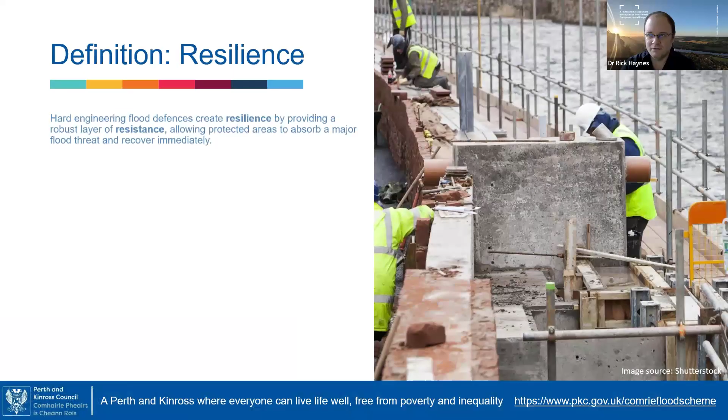So just to start with, I thought I'd pull up a quick definition of resilience in the context of a hard engineering flood defence. The terminology in flooding is complex and sometimes can be misunderstood by public and practitioner and policy alike. But in my interpretation of this, we create resilience by providing resistance to the effects of flooding. And we do that at a range of scales, in this instance at the immediate community level by providing direct protection to homes and lives, reducing trauma and flood anxiety.

In this instance, you're seeing a large scheme. It's something visible, it's something weighty, and it can play positively to mindsets of those that have been affected. And these things will invariably provide a reduction in property damage, allowing the community as a whole to resume normal life relatively quickly, sometimes instantly. It also plays at the national scale because we have economic productivity. In this instance for Comrie, it's got a large amount of tourism interests. It is a very pretty village in the Perthshire countryside, and that plays to the national economy.

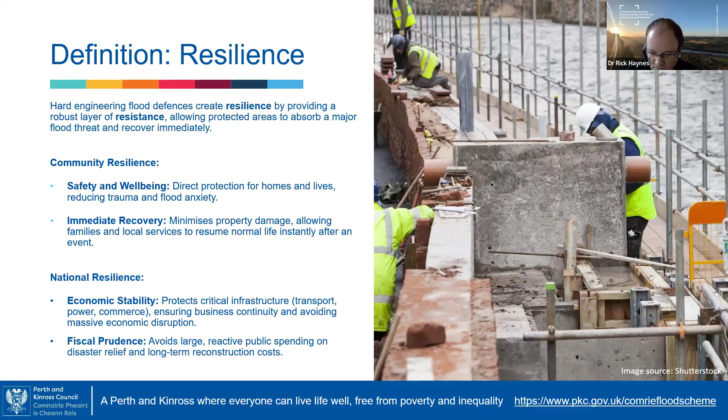So Comrie itself, for those that are watching and don't know the Scottish countryside, and I say that to a degree myself, I've been in post 18 months now, so I'm learning a lot of the geography, both in terms of rivers and communities. But Comrie is on the confluence of three watercourses: the Earn, the Lednock, and the Ruchill, the Water of Ruchill, or Ruchill Water, depending on how you reference it.

This is one of the larger strategic flood protection projects that all local authorities in Scotland are looking to deliver where appropriate. And the council, under the necessary legislation, is a responsible authority. So there are various labels: local authority, flooding authority, but in the Flood Act, we are a responsible authority tasked to promote sustainable water and environmental management. And this is one of the options that is being taken forward.

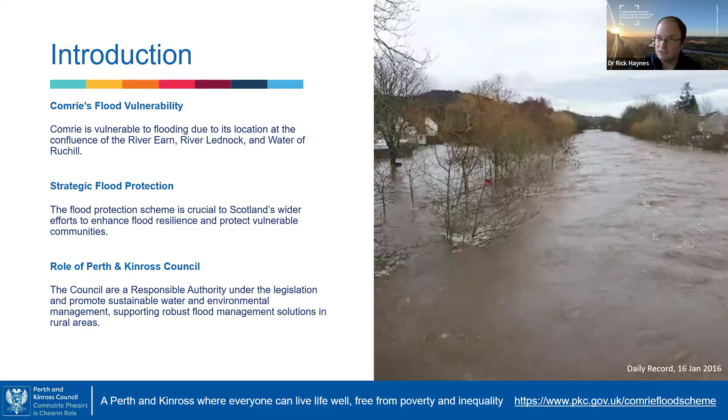So the flood scheme itself, from the EU Floods Directive transposed down through the Flood Risk Management (Scotland) Act 2009, sets various responsibilities for various parties, and that ranges from government down to the individual. As with all legislation, there are good bits and more challenging bits, but the reality is everybody has a part to play in flood risk management.

In terms of the local area, Comrie falls within the Tay local plan district, and the areas of interest are covered within the flood risk management strategies and then into the local flood risk management plans. The strategy initially sets out a high level view as to which communities are perceived to be more at risk of flooding compared to others. And then the local flood risk management plan puts the onus on a collection of local authorities at a catchment scale to refine thoughts, theories, and approaches on what they will be doing to mitigate the impacts of flooding to those various communities.

I'll try and step through these quite quickly and we can get to the images at the end. Now, I'm not expecting everybody to read all the detail here. This is an illustration of the action put to Perth and Kinross Council for Comrie in potentially vulnerable area 08/14, which is Comrie in this instance, to deliver a flood protection scheme.

And this is the sort of distillation of all the national assessment of communities at risk around Scotland, and various standardized structured reporting for what the issue is, who will be involved, are there any related activities, what are the potential impacts, and the relative ranking at a national, local, and LPD scale within a 6-year period. So the Flood Act working within 6-year cycles. So that is done for schemes, studies, natural flood management, surface water, a number of actions under the legislation.

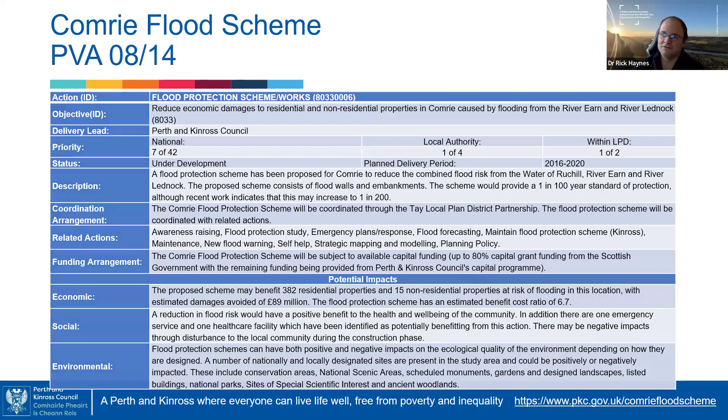So timelines associated with this specific one, and each study and project and scheme is different. But to illustrate the 3 phases of planning, design, and construction, the earliest study that the council has for sensible reference to came from December 2006. Now, there will be a number of studies done for locations that are at risk of flooding, in this case 2006, but there have been more since then.

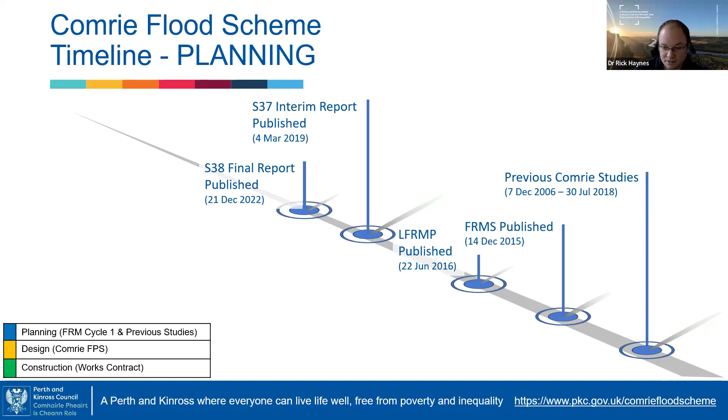The strategy was published in 2015, the local flood risk management plan in 2016, and then the halfway report, the interim report in 2019, and the cycle 1 final report in 2022. So this was the flood risk management cycle 1 key reporting exercises. We then were moving into the sort of outline design phase, which started with tendering in 2017. Sweco undertook the outline design until 2020.

Statutory process for notifications and consultations took over a year from 2020 into the end of 2021, and then moved into detailed design, having done a local authority hearing to consider objections that were lodged to either detail or the wholesale view of whether the scheme was necessary, effective, or appropriate. And after that was addressed, it moved into detailed design phase from 2021 until 2023.

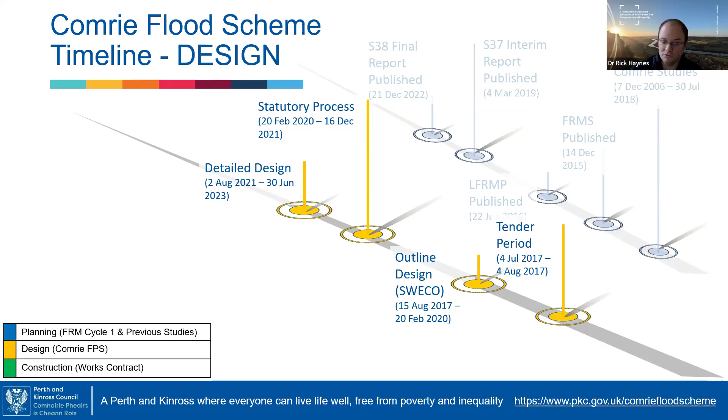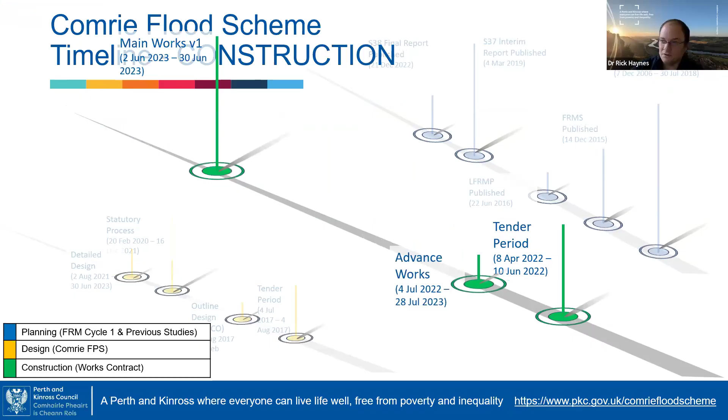Construction, with tender period starting in 2022, there were some advanced works, which I'll show pictures of later, starting in the middle of 2022. The main works, there was an attempt to start in June 2023, but the tendering period for that didn't work out well, so we had to do a second tender exercise in the middle of 2024. That was successful, and as I'll show in the images, the main work started towards the end of 2024 and they are expected to conclude by the end of 2026.

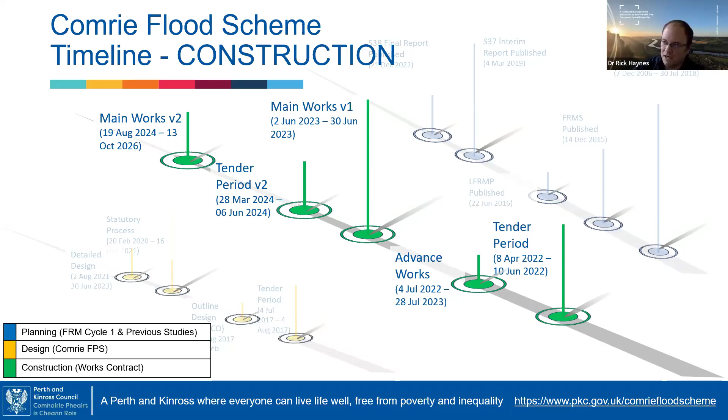Obviously, this is a live project, so October 2026 may be retained or it may move, just as construction projects typically do. The main point of all of those moving markers is to show that this is a very, very long process. From the earliest studies available in 2006 to the end of construction expected at the end of 2026, you're talking the best part of 20 years. Now, some schemes might take less time, some schemes may take more time, some schemes may fail along the way for one reason or another.

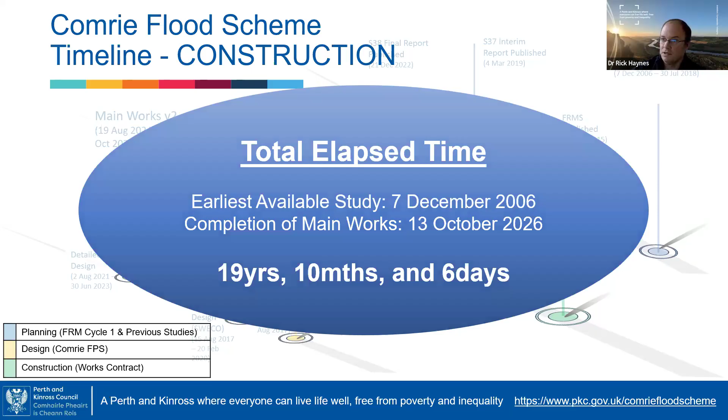But for Comrie, we're looking at the best part of 20 years of effort along the way, changing science, changing policy, certainly changing resources and changing contexts generally. So it's not a quick exercise to deliver one of these things. So some key facts for those that don't know the sort of structure of Scottish flood risk management. The outline that you should be seeing now is the Tay local plan district in red, with a small orange blob towards the lower side of that red boundary, which is Comrie itself.

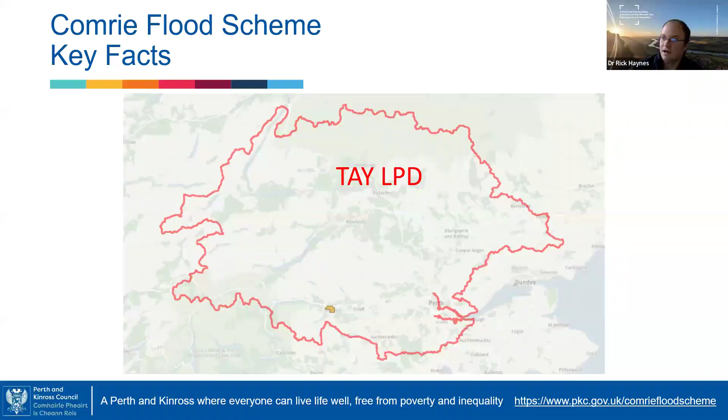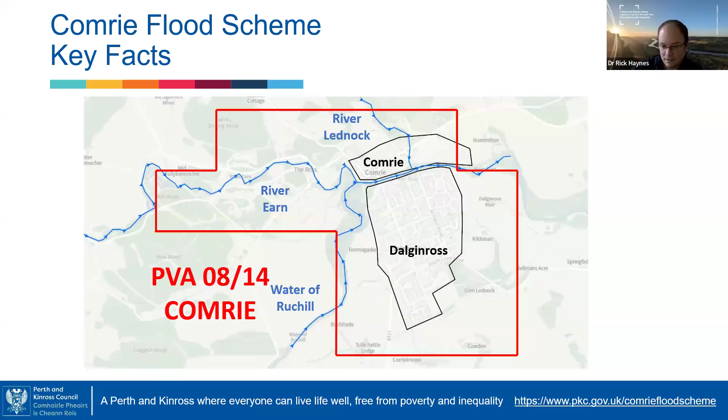And I'll now move across to zoom in on that potentially vulnerable area, and you should be seeing an illustration of the confluence of the three watercourses, the Earn, the Lednock and the Ruchill, and then the two main urbanised pieces of Comrie and Dalginross. And these are the community areas that are mainly at risk of flooding and have been clearly for a number of years. So that's the sort of local geography of where we are intervening.

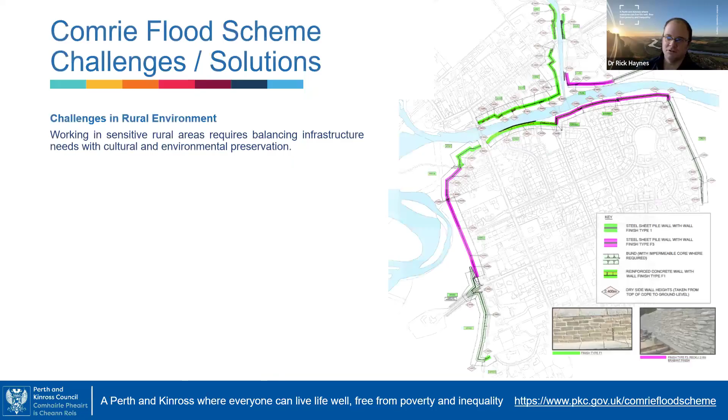A number of challenges. It is a rural community. We have to be sensitive to balancing infrastructure with cultural and environmental preservation, with historic heritage spaces. You have to be careful with design that it's effective, but also in keeping with what the community wants and needs. And that involves a lot of community engagement.

We have both the contractor and also us as client on site daily, engaging with the community through community councils, individually, just providing updates as best we can, adapting things as we go along. So if there are approaches that need to be adjusted, we will do.

Let's move on to the next. Come on.

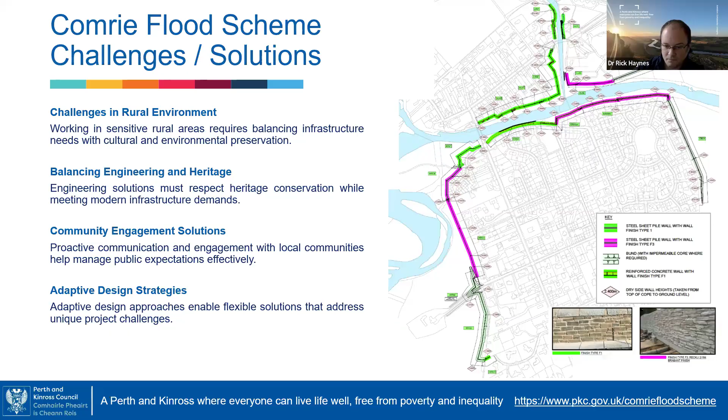So some key facts for the scheme. We're looking at best part of 3 kilometres of new defences, mostly walls and embankments. Best part of 190 properties, both residential and business, better protected after we finished. According to the assessments, we're looking at more than £41 million worth of future flood damages avoided, and we are doing so by constructing to the 0.5% AEP, or the 200-year standard of protection.

Obviously, that's a different metric in Scotland compared to down in England, where traditionally the standards of protection and the assessment from a planning perspective as well is on the 100-year. Designer, we appointed Sweco to be designer, and they are still providing input as we go through construction. Balfour Beatty were appointed through the SCAPE framework with their early contractor involvement starting in 2021,

and then providing the advanced works to the tune of 1.3 million over 2022-23 before getting into the meat of the contract, the construction contract over 24 to 26 at the best part of £27 million. So that gives you an idea of the sort of numbers associated before it all started, and the illustration is to show a little bit of the difference between sheet pile walls and earthwork bunds to protect the communities on both sides of the watercourse.

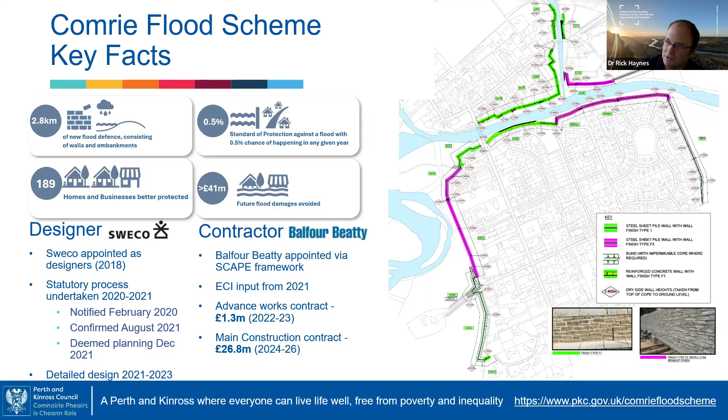Like I said at the beginning, pre-construction, we did have objections, and the statutory process requires us to consider all objections, whether it is 200 or 2,000. We have to consider them all equally, and that was dealt with through the local authority hearing. It's a long process to go through this, and it can stress communities when they know things are being considered and progressed, but we have to go through the process.

And that involves getting through procurement and early contractor engagement in a challenging economic climate. It is never a straightforward exercise to appoint contractors, especially on big schemes like this. So we've learnt that maximising the early contractor involvement has a benefit on the procurement and pushing the project. So there's multiple benefits involved in this.

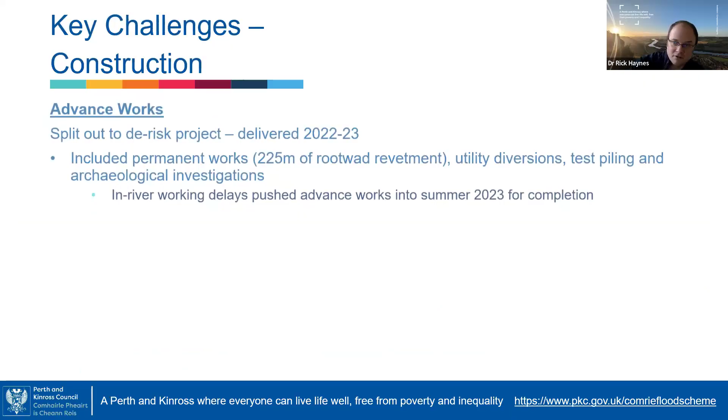And then obviously you've got a timing aspect to think about within in-river working. And that's driven predominantly by licensing for certain watercourses. You can't go in certain parts of the year, but also flood events, they come through, and from a safety perspective, you have to react accordingly.

Main works, like I said earlier, awarded in 2024 and expected to complete at the end of next year, 24-month programme. We did a soft start to allow the contractor to get involved as best they can early, and also to lessen the impact on the local community. We didn't want to just turn up on a Monday with all the equipment and just start hacking at the countryside and start building things. We had to work carefully. Things like tree felling, to make sure that it was done sympathetically and with the engagement with the community.

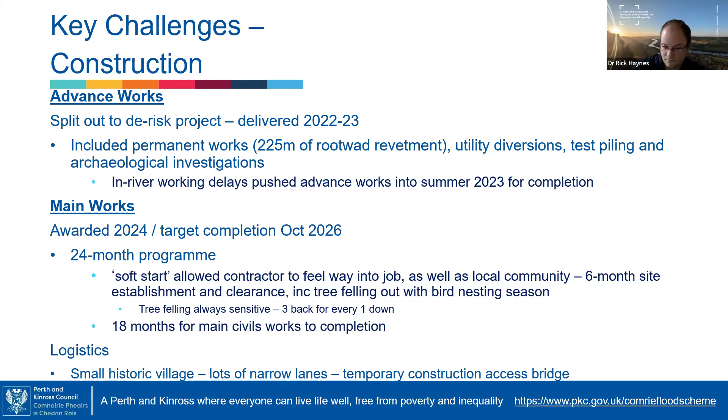But it doesn't look nice when you've cleared all of those trees to an established community, but it's part of the bigger engagement process and part of the bigger picture of delivering a flood scheme. Let me move on.

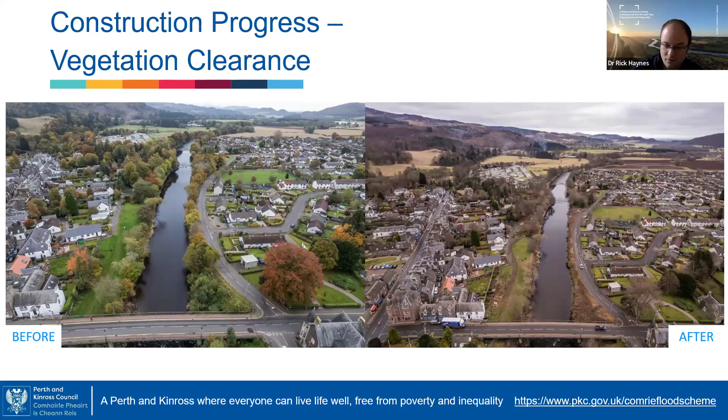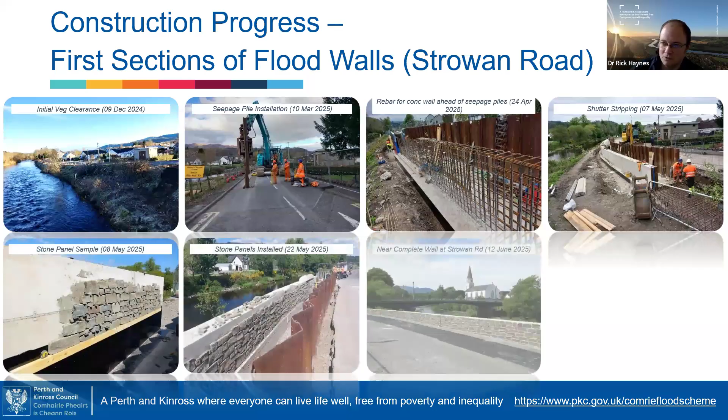Next few slides are some illustrations of some of the local works as they're delivered. What you should be seeing now are some initial sections of flood wall going in, and they are both right up next to the watercourse and also some setback. Hidden features, like you see in the illustration with the blue excavator, installing seepage piles to stop the subsurface movement of water behind the scheme.

We're trying to turn some of the effective engineering approaches into something sympathetic to the local heritage finish. So we're doing natural stone finishes to what are effectively rebar, concrete, sheet pile, structural walls, and making them look more in keeping. Obviously, they will look very new at the beginning, but they should age.

So that was some of the initial works, and that's all in one location. It's Strowan Road in Comrie, and you can see it on Street View, and go back into the photos and see what it used to look like and what it looks like now.

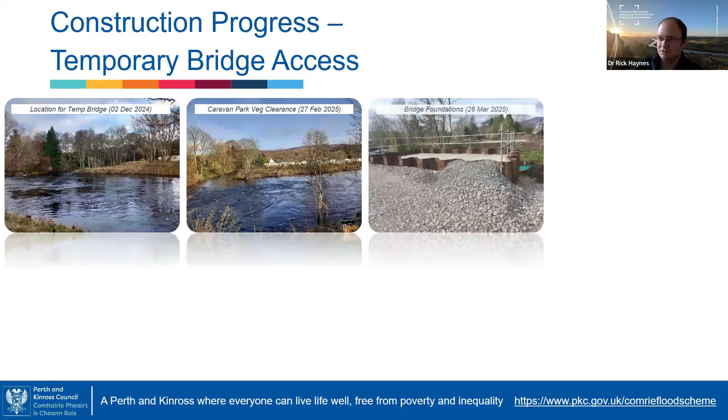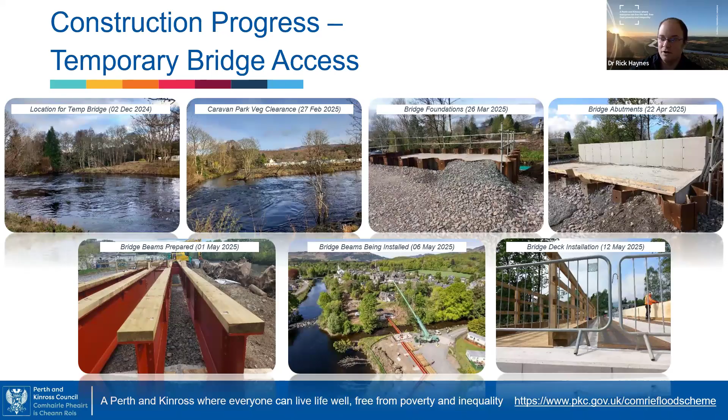Like I said, we did have to introduce a temporary access bridge to get access to certain bits of the site across Comrie. It's not a small bridge. These are quite intensive exercises to enable what is effectively a flood wall and flood embankments to be constructed, but with the equipment needed to do the sheet piling work, you couldn't get down to some of the locations using the local tracks and roads. So we had to install a temporary bridge, which will be removed once we are complete, but it shows what needs to be done.

The advanced works that I mentioned earlier, we are doing and will consider natural flood management approaches, so saving some of the cleared materials in terms of trees, both locally and from other projects, and then installing them into the bankside to ideally reduce the amount of erosion on the outside of a bend.

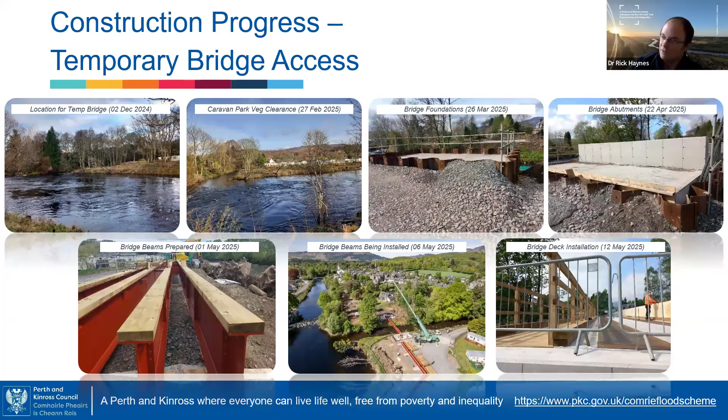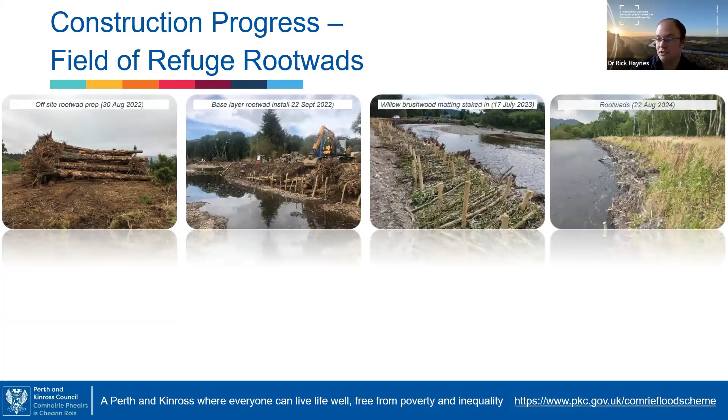They don't always work perfectly for the lifetime of when we need them to. So there was some degradation and some scour. So we had to come back and put some rock armour around the root wads, but not using steel and concrete, to stabilise the banks.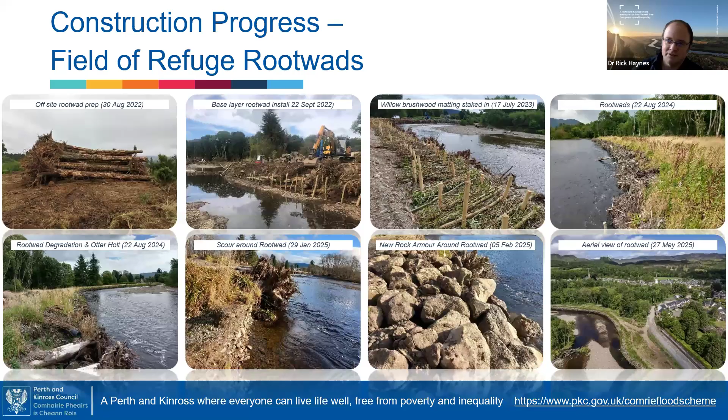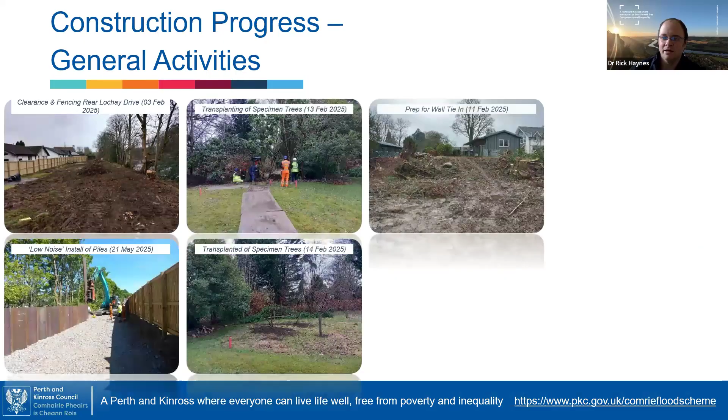Some general activities that go into delivering one of these schemes. Obviously, we've got to get access down the back of people's gardens. So there's been some negotiation with multiple property owners to temporarily curtail their garden usage while we can get in and build the scheme. That will obviously be reinstated, and we work with each property owner to deal with reinstatement.

We take a pre-clearance survey of what they had. We engage with them along the way, and then we talk to them towards the end about reinstatement and what they want. We'll also do some transplanting of specimen plants and trees where practicable. So we're not just turning up and clear felling everything in the way. We'll look to relocate plants of particular significance, either to the community or to the individual.

And then we've used, along the back of the houses, low noise piling rigs to reduce the stress on the nearby residents over, in that case, May and the summer months. This went through the summer period. There were noise monitors on site permanently, and there were regular meetings with the residents to ensure that they were kept up to speed with how the piling was progressing, how quickly they were going to move on, and whether there was any damage or negative impacts of the piling experienced from their side of the fence.

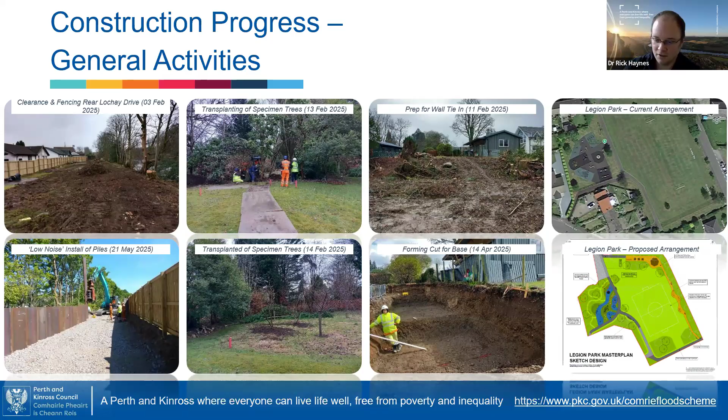We had to do quite a bit of excavation in certain parts to tie in walls to the higher ground around the properties. So it's fairly invasive, intensive work. But at the same time, we're doing community projects as well. Legion Park is one of the local play parks. Some of the stones from the bank protection that wouldn't fit within the works are being repurposed to be part of the play space. We're also taking the opportunity to update and upgrade the play park there. So we're trying to do other things than just build embankments and walls.

For those with more of a project delivery and management interest, this is just an illustration of the fact that we are in the meat of the project now. We're early December. There's no real detail needed to be pulled out of this, except to say we started at the end of last year and we'll go to the end of next year, and these project phases have not moved, so we're in the middle of it all now.

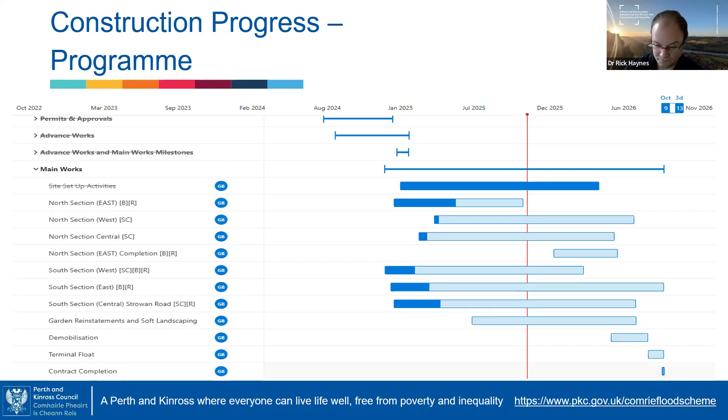That was in terms of time. This in terms of tasks. 14 tasks left, 34 completed. So 71% of the project is completed. There's a lot of clearance and installation of materials. Now it is the fine finishing work and the reinstatement into the end of next year.

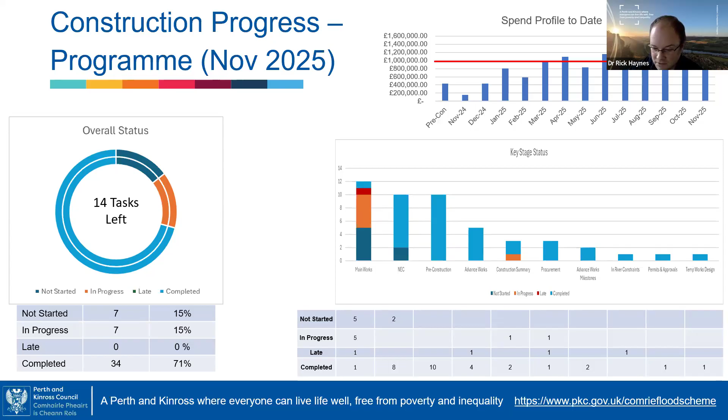The key bit to take away from this is obviously the spend profile, which gives an illustration of where most of the spend and effort is going. But broadly speaking, Comrie Flood Protection Scheme runs at about £1 million a month of spend, which to my mind is not an insignificant amount for a local authority to manage. Over a 2-year period, it's quiet at the beginning, and then there'll be something towards the end. But running at £1 million a month for 2 years is a decent amount of money.

And then hopefully this slide will start to work for people. I did trial it just before everything started. These two videos are basically separated by a calendar year. We run drone surveys every month. We use it for project and discussion purposes, but you can start to see where we are building things.

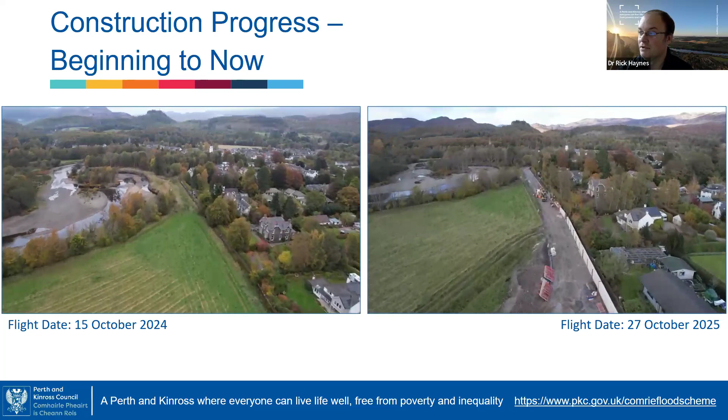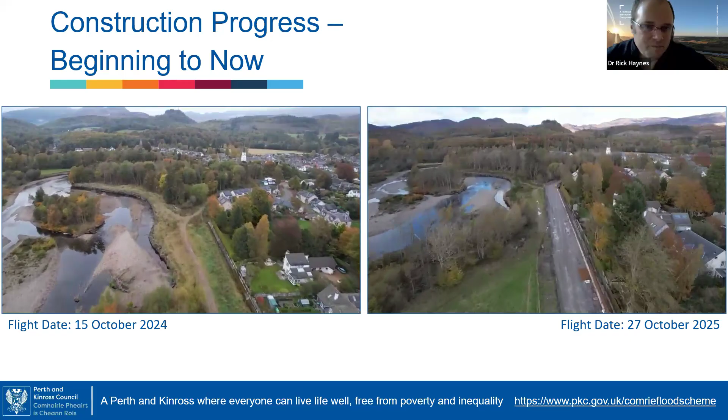We're getting towards where the rootwad bank protection is now, with the flood wall protecting the community on the right and the wall running up the middle. So this is basically going all the way around the main community of Dalginross, with Comrie on the left-hand side of the images. But the walls and embankments thread their way through the communities. It's using the higher ground, tying in where possible.

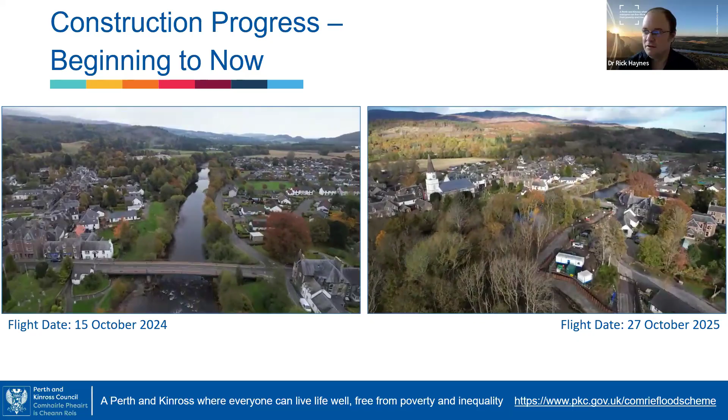It's trying to make sympathetic flood walls, not adversely affecting heritage structures along the way, and also being mindful of the facilities that you don't see, the utilities that crisscross beneath our feet. The basics of the sheet piling and the walls had to be adapted in a number of locations to allow services that couldn't be relocated to be retained, all the while thinking about the changes of weather in the year, and making sure that the scheme was not going to make things any worse while it was being built, and that we could protect the communities to the best of our abilities without damaging or modifying the scheme while it was being built.

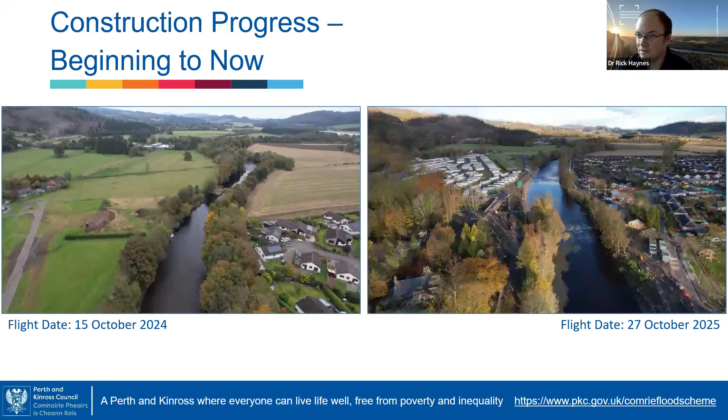So this is getting down towards the downstream extremity of Comrie and Dalginross, but it's flood walls on both sides, and amenity access is still there. There's footpaths and access throughout. So, like I said, we run these every month, and we're now finding that the use of drones for these large-scale projects is a very valuable tool. It's moved from being what was initially a toy to now being a tool, and it's very useful to be able to illustrate in events like this.

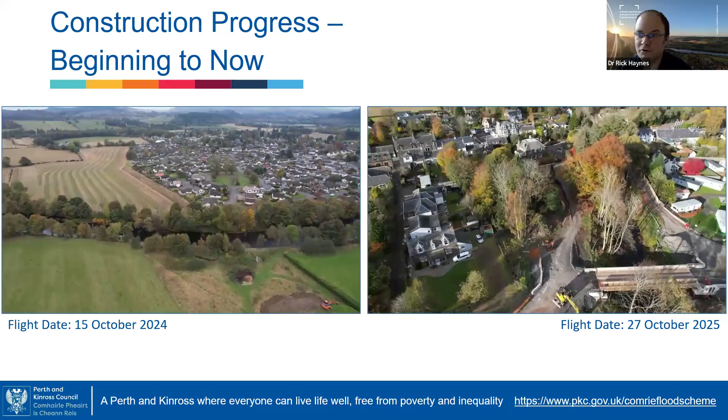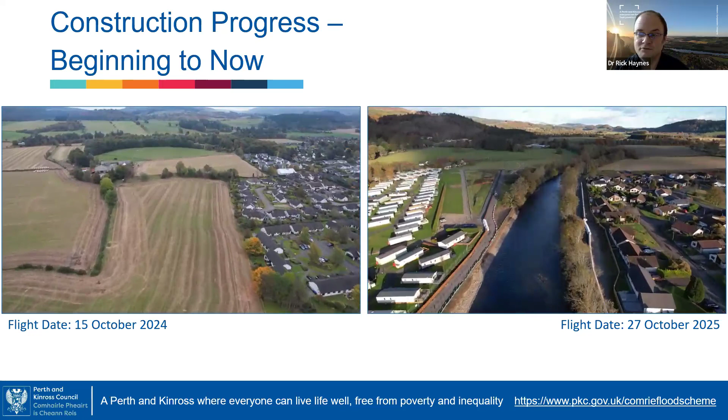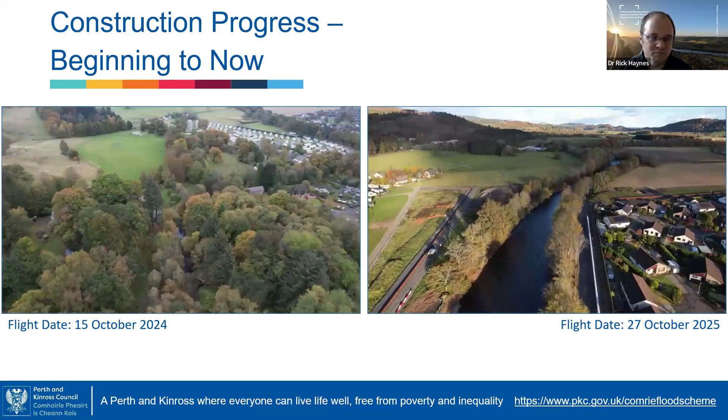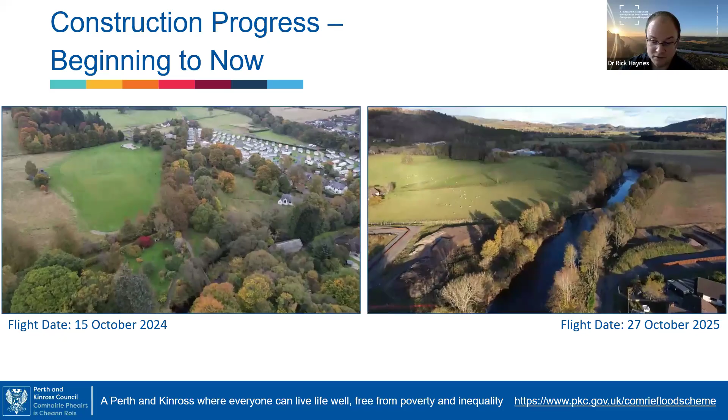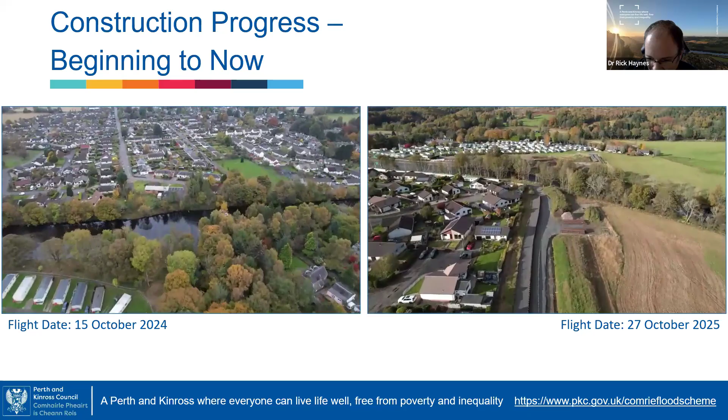Yeah, there were times during August where it would be possible in theory, and I wouldn't recommend it, you could walk across from one bank to the other side of the Earn. The water was very low, but as you saw from the previous images, it was entirely possible to get high flows, and that's a variance of 3 meters or so. I know there are bigger watercourses in the UK, and there are certainly bigger watercourses beyond the UK. But in this instance, midway through construction, it was something to bear in mind that those ton bags needed to be stable.

The rock rolls that are at the bottom there needed to be secure because should a high flow come through, it's entirely possible that they would be mobilised, and all the equipment and all the resources and people that are trying to install them, and then ultimately the protection of the community, because those materials that move could cause problems by blocking bridges, assets elsewhere.

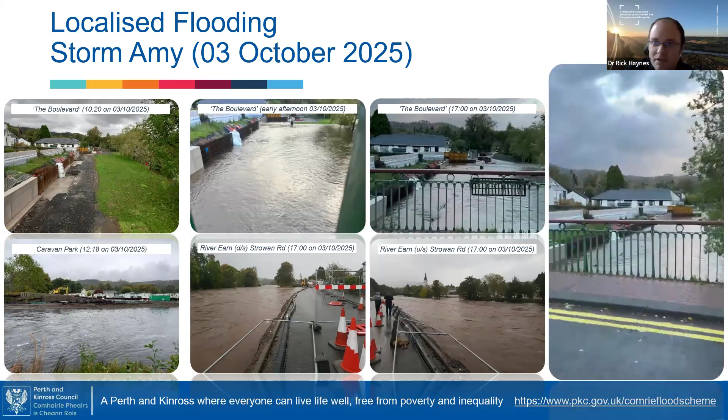You're still on the Storm Amy slide. Am I? Yes. Okay. Let me see what I can. If I briefly stop sharing, and if I then go back to sharing a screen, Barbara, can you confirm that that's now showing the right screen? It's now on low flows, August 2025.

Okay, perfect. Thanks, Barbara. Right, so to go with all those words I just provided without the illustration, and hopefully to replace the mental images, this is the sort of experience that we had on the Earn in August 2025 in terms of low flows. So quite a variation from Storm Amy to August. It shows the variance that we're dealing with, and for those that are all familiar with climate and the fact that this is going to be more prevalent and more extreme going forwards, this is the sort of illustration to go with that.

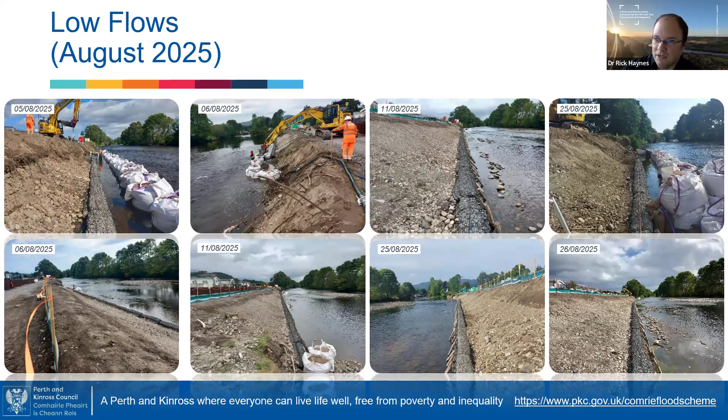Right. Hopefully, moving on to outcomes and legacy. The aim here is obviously to reduce flood risk to a community that has been affected for years, if not longer, decades. Safeguarding, making communities more sustainable, introducing community resilience through protection and additional confidence in structural and non-structural interventions. This is predominantly structural, but others will be non-structural.

Providing environmental benefits, using sustainable practices, and I do say that carefully with the context of removing a lot of trees at the beginning, but by reintroducing appropriate trees, considering where there are habitats, otters and the like were spotted on site, so we had to work carefully alongside them and provide a sort of a legacy here for future flood protection schemes in similar contexts.

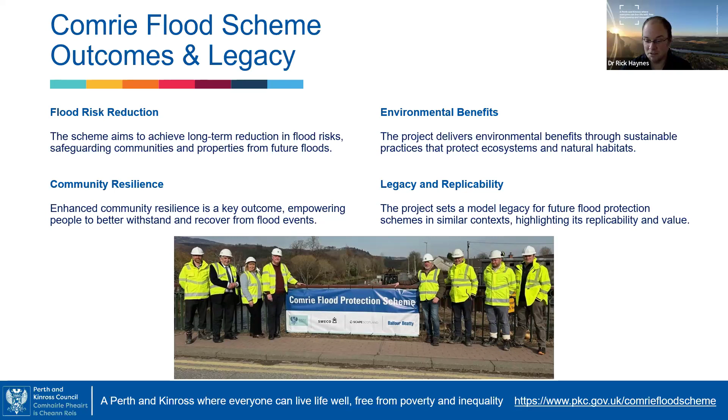So we are providing feedback to other local authorities as to what our experiences have been in detail and strategic scales for delivering flood schemes, because we've all got the same intentions, but we've got different experiences and lessons to provide. So these are the key outcomes from the Comrie Flood Scheme, but it's still a work in progress, literally. The expectation is to conclude at the end of next year. So that's a whistle-stop tour of a scheme in build.

I think if there are any questions, let me see. Let me go, if it's okay, to the beginning there. And Richard, yes, I was mindful of our chats about terminology offline, and also resistance and robustness to the recovery resilience. Have you felt constrained by legislative regulatory standards? Legislative, yes.

To a greater or lesser degree, each local authority is, by the nature of the legislation and the regulations that go alongside it, in competition with other local authorities to deliver because of the funding requirements. It's not easy. These things are not cheap. Authorities do not have all the funds available in-house to deliver. So the process is that we, through the assessment side and the design side, go through prioritization, and if you're successful through that, Scottish Government would provide up to 80% of the funds to deliver the scheme on the ground.